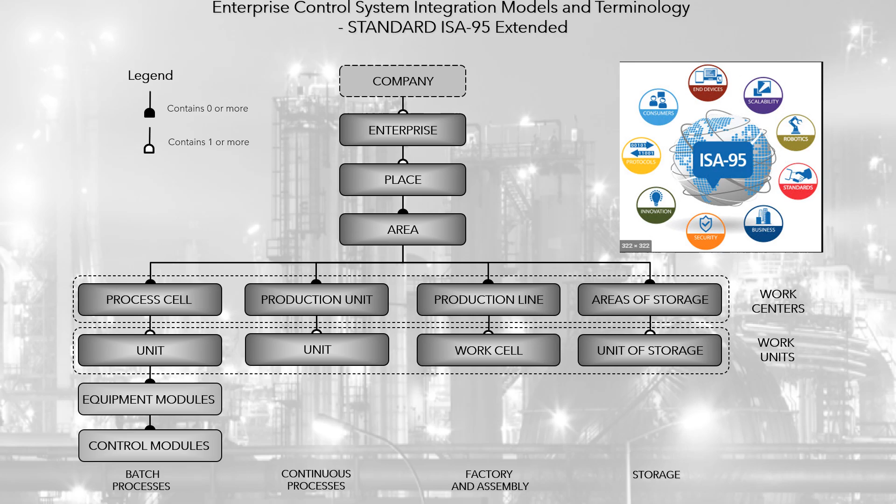To describe the structure of a refinery, HAi has selected the ISA 95 standard, which allows easy sharing of information with other systems and/or mathematical models that share this standard. The refining industry aims to obtain from petroleum a series of products of well-defined quality, ranging from light gases, such as butane and propane, to heavy fractions, fuel oil, asphaltenes, through intermediates, gasoline, gas oil and lubricating oils.

Oil as such does not have a use of great importance; its importance lies in the fact that from it, through a series of physical and/or chemical processes, numerous derivatives are obtained, such as fuels, lubricants, solvents, asphalts, paraffinic waxes, etc. The transformation of crude oil into derivatives is carried out in refineries that use crude oil of different physical and chemical characteristics as raw material. The classification of petroleum products is summarized in the table: basic, byproducts, and chemicals and petrochemicals.

Based on the above, a refinery can be conceived as a large process unit, or macro installation, that receives crude oil as input and produces refined products, consuming other inputs and auxiliary services, and producing waste and pollution secondarily. The image presents an example of a refinery, which is composed of 5 facilities, or process units. And an industrial services plant, where the transformation of energy sources is carried out to meet the different forms of energy required by the process plant.

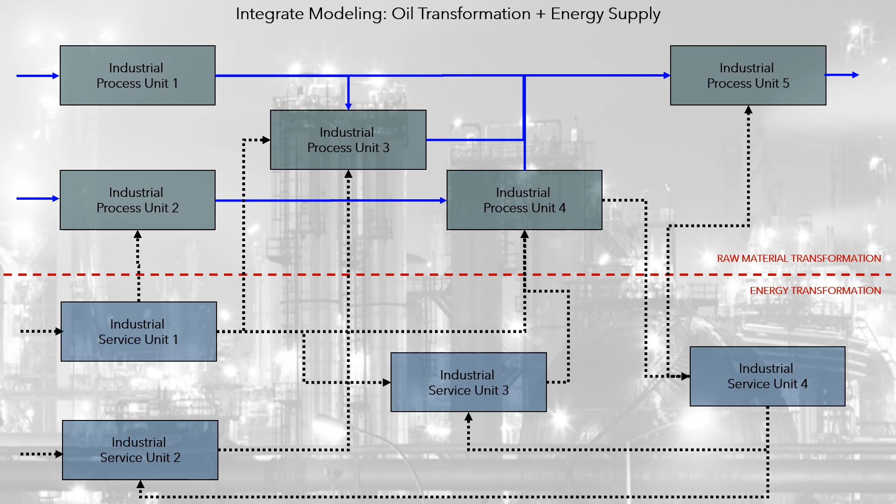Connectivity between the two processes is based on the consumption of auxiliary services, directly and/or indirectly, carried out by the units to carry out the processes that allow the transformation of raw materials into refined products, consumption that is a function of the so-called level of activity of the units. The processing of ancillary services can be conceived primarily as a process of transformation of the energy required by industrial processes. The following diagram summarizes what has been said.

A refinery is the union of two processes. Product processing: conversion of crude oil and biomass into refined products by means of process units. And auxiliary services transformation: processing of ancillary services required by processing units by means of special units, called service units. Units are represented based on the products they consume as inputs and those they produce as outputs.

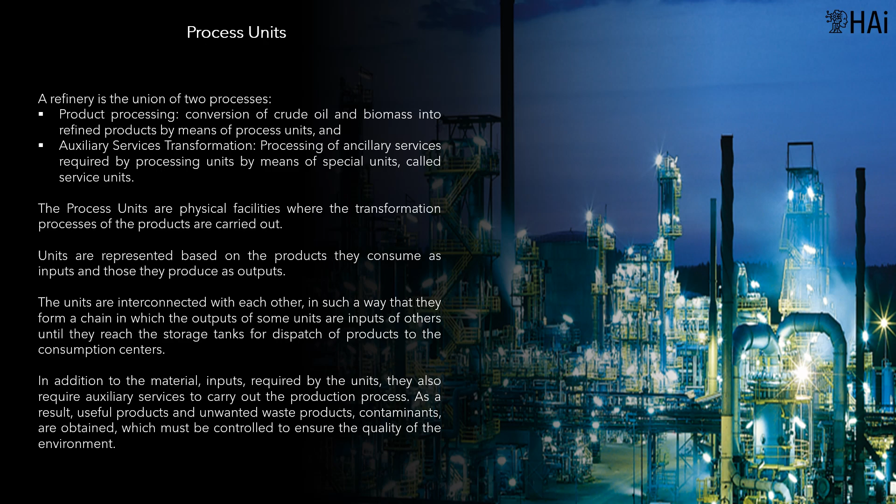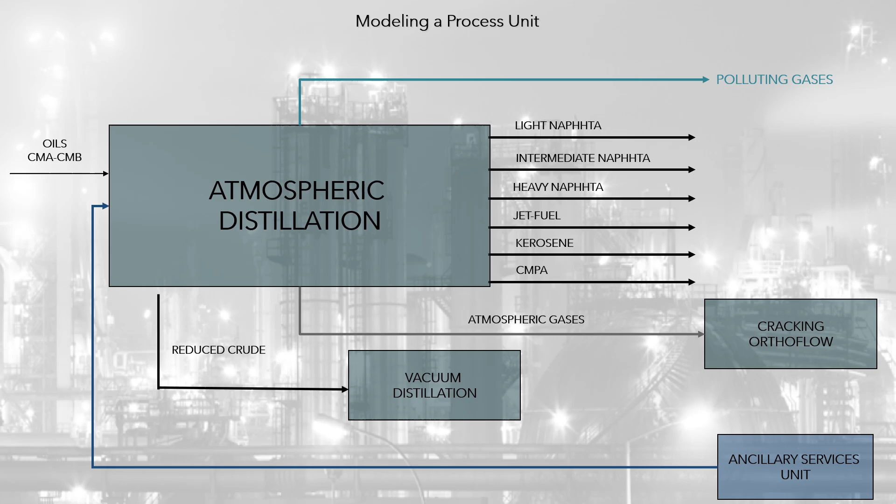The units are interconnected with each other in such a way that they form a chain, in which the outputs of some units are inputs of others, until they reach the storage tanks for dispatch of products to the consumption centers. The process units are physical facilities where the transformation processes of the products are carried out. In addition to the material inputs required by the units, they also require auxiliary services to carry out the production process. As a result, useful products and unwanted waste products, contaminants, are obtained, which must be controlled to ensure the quality of the environment.

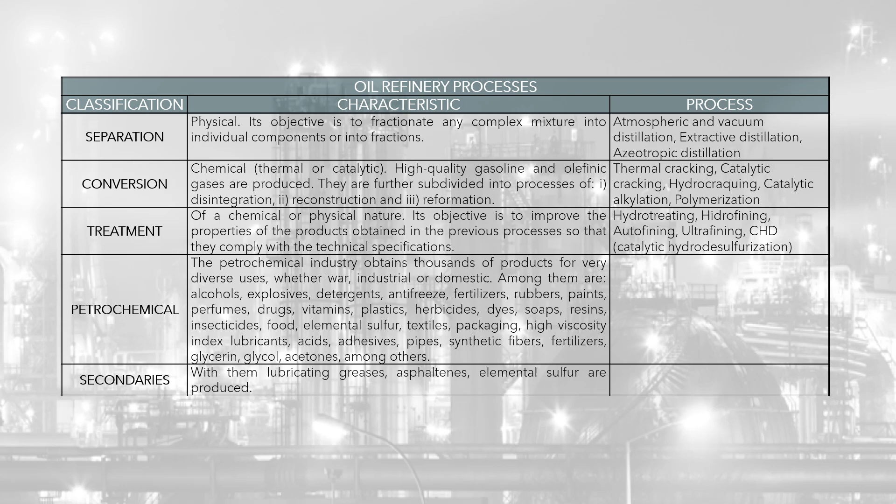As crudes are of different characteristics, refineries must adapt for each of these types, and that is why a refinery can use different processing processes than other refineries. In addition to the difference in crude oil, economic and technical factors also influence the type of refinery. Despite these differences, in general terms, refinery processes are divided into separation, conversion, and product treatment or finishing processes. In addition to these so-called primary, or basic, processes, there are others such as petrochemicals and secondaries.

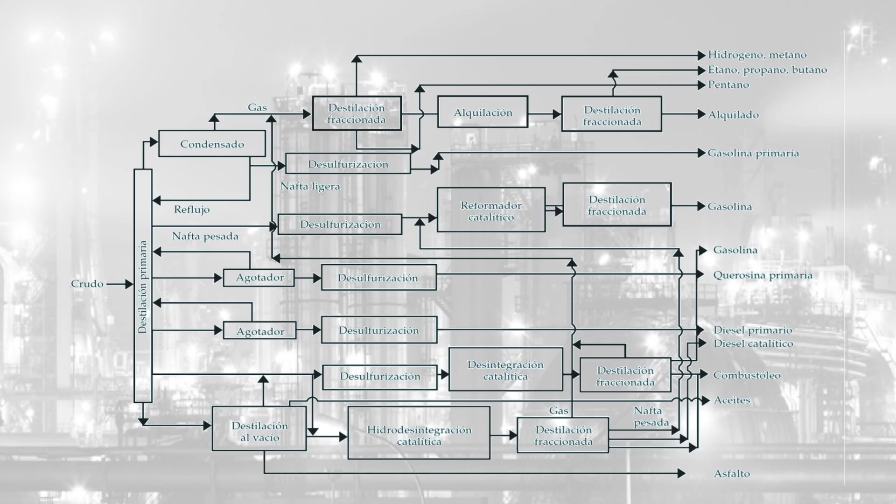The graph presents a general diagram of what a crude refinery can be, which can be summarized as the connectivity of a set of process units of different types that work together to produce the refined petroleum products demanded by the market. The types of technological processes that are carried out in the process units that make up the refinery are presented in the table.

A biorefinery is a structure that integrates biomass conversion processes, organic matter of animal or vegetable origin, and equipment to produce fuels, energy and products. Under the generic name of biomass, a very heterogeneous set of materials is included.

Both by its origin and by its nature, it is possible to differentiate it in natural biomass, that produced by wild ecosystems such as algae, green plants and forest products; and residual biomass, that which can be extracted from agricultural and forestry residues, and human activities.

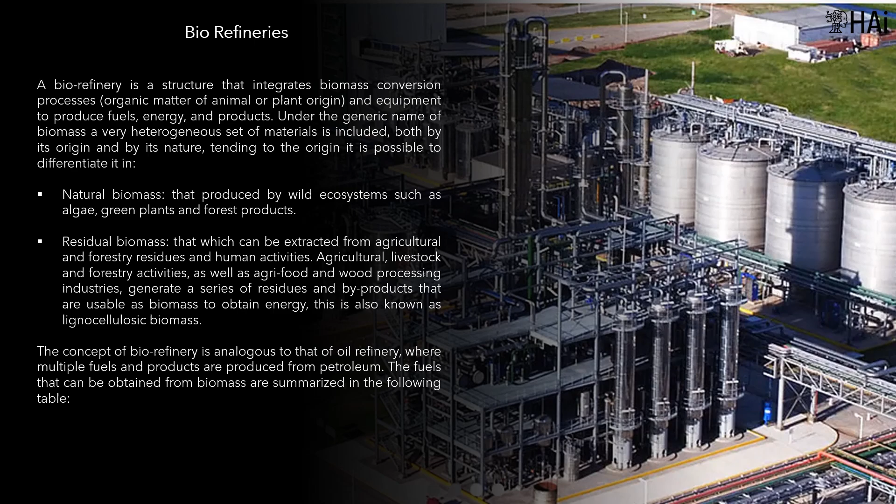Agricultural, livestock and forestry activities, as well as agri-food and wood processing industries, generate a series of residues and byproducts that are usable as biomass to obtain energy. This is also known as lignocellulosic biomass.

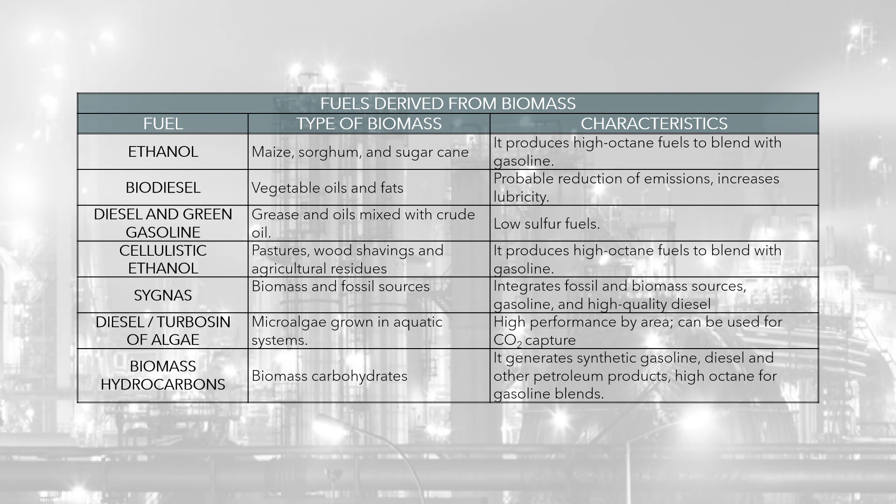The concept of biorefinery is analogous to that of oil refinery, where multiple fuels and products are produced from petroleum. The fuels that can be obtained from biomass are summarized in the table. The image presents an example of a sugarcane ethanol biorefinery, which is composed of 6 process units.

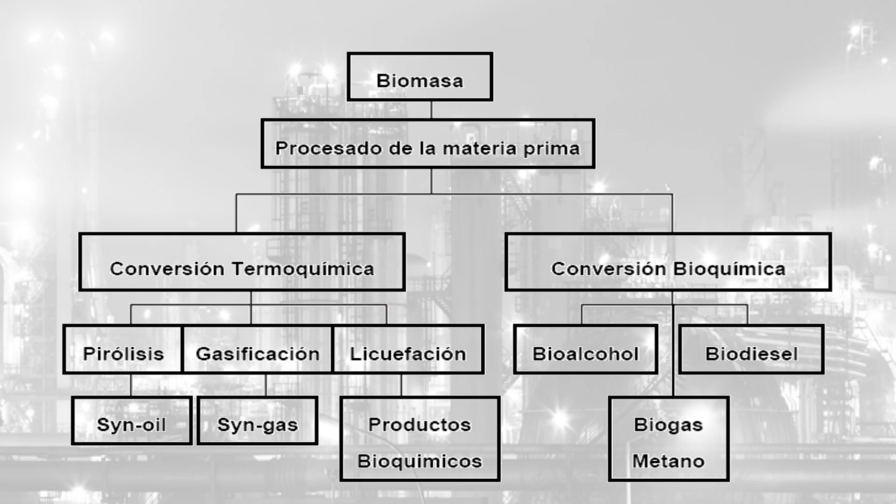Linear optimization model for sales and operations planning, S&OP. HAI-OIL-REF includes a generic model that can serve interchangeably to plan, at the aggregate level, the 2 crude and/or biomass refining processes. The level of aggregation is fundamentally related to the non-linearities associated with this type of process, but not with the level of detail with which it is possible to represent the production processes, which can be spatially detailed in all units used in the production of refined products.

HAI-OIL-REF considers the refining process as a union of 2 processes: product transformation, conversion of crude oil and biomass into refined products through process units, and energy transformation, processing of auxiliary industrial services required by process units, which are consumers and/or energy producers, in so-called service units. The objective of optimization is to determine the production plan that meets the demand for refined products, according to an offer of available crude strips, purchased or to buy, during the planning period.

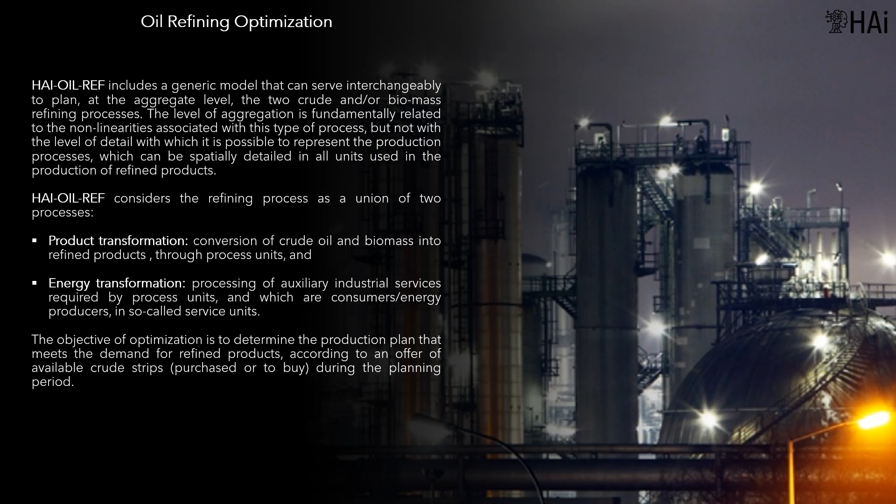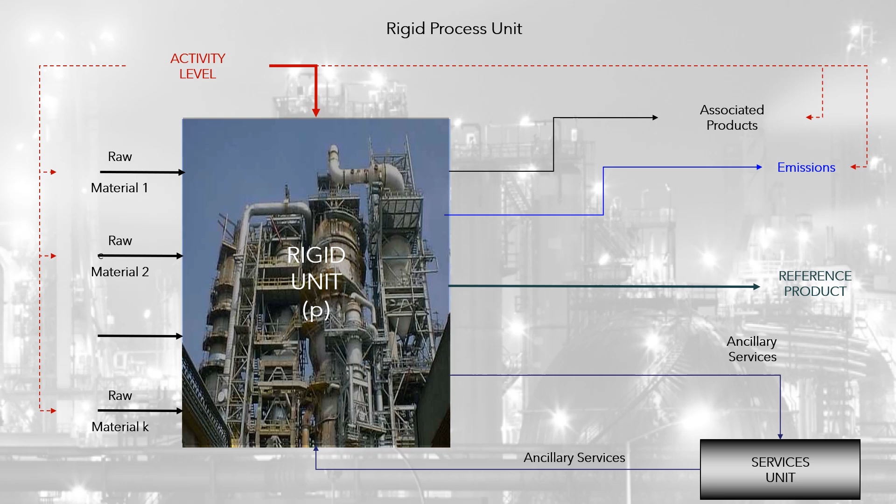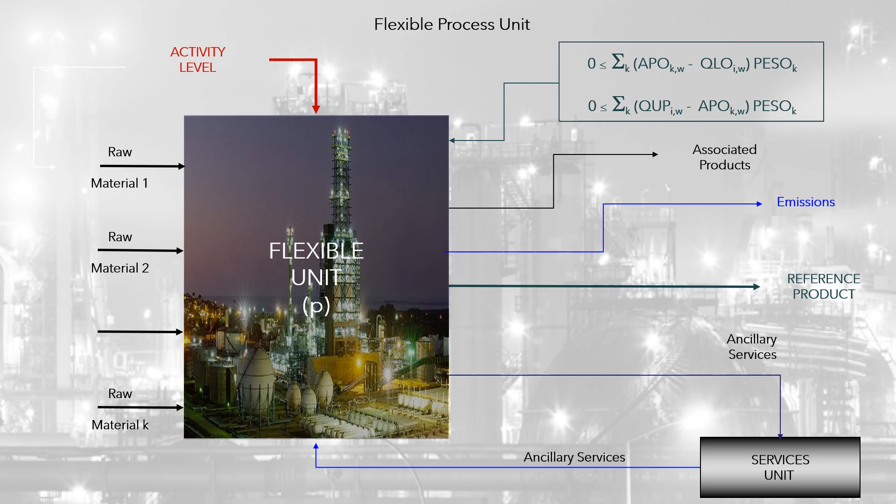From the point of view of mathematical modeling, HAI-OIL-REF considers 2 types of process units. Rigid unit considers a unit as a process that is defined based on certain input, raw material, refined final or intermediate products, and that produces refined products in fixed proportions; and flexible unit considers multiple possibilities for production processes in which the proportions of the blending of the products consumed, and the quantities produced, are determined by the model. For flexible units, quality specifications must be introduced as part of the model constraints, so that the volume and/or weight product generated by the model meets these specifications.

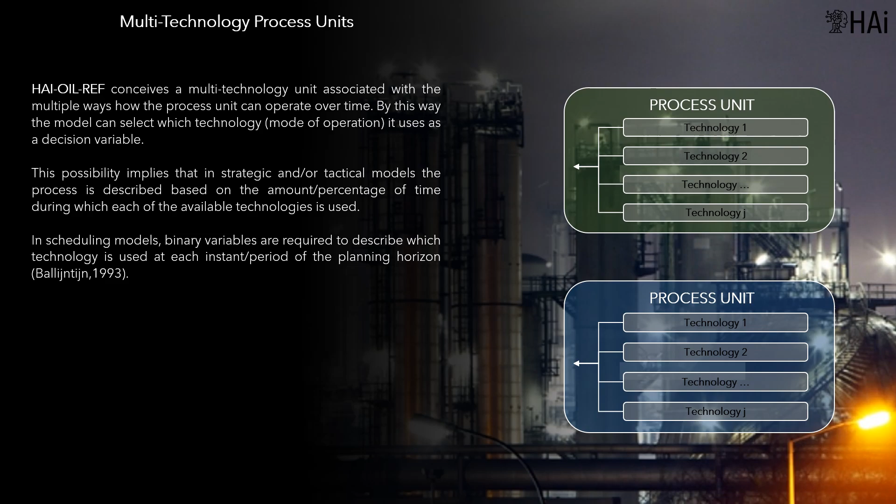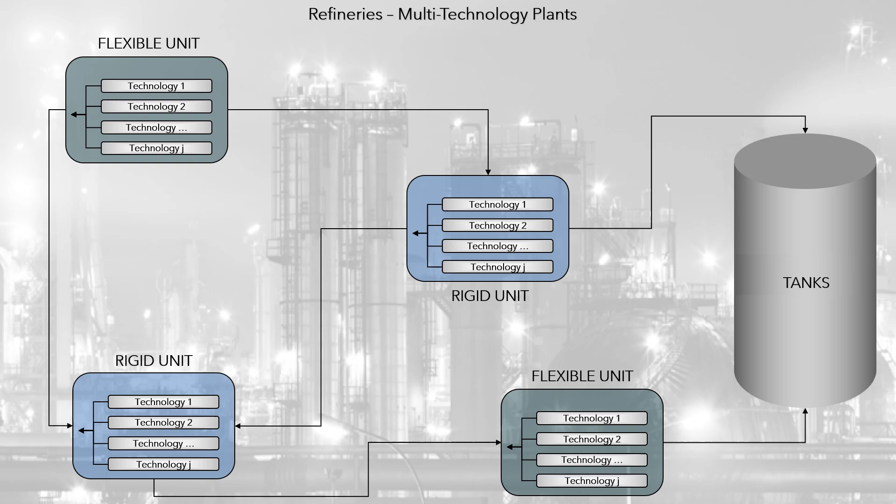HAI-OIL-REF includes a multi-technology unit, associated with the multiple ways the process unit can operate over time. This way, the model can select which technology, mode of operation, it uses as a decision variable. This possibility implies that in strategic and/or tactical models the process is described based on the amount, or percentage, of time during which each of the available technologies is used. In scheduling models, binary variables are required to describe which technology is used at each instant, or period of the planning horizon.

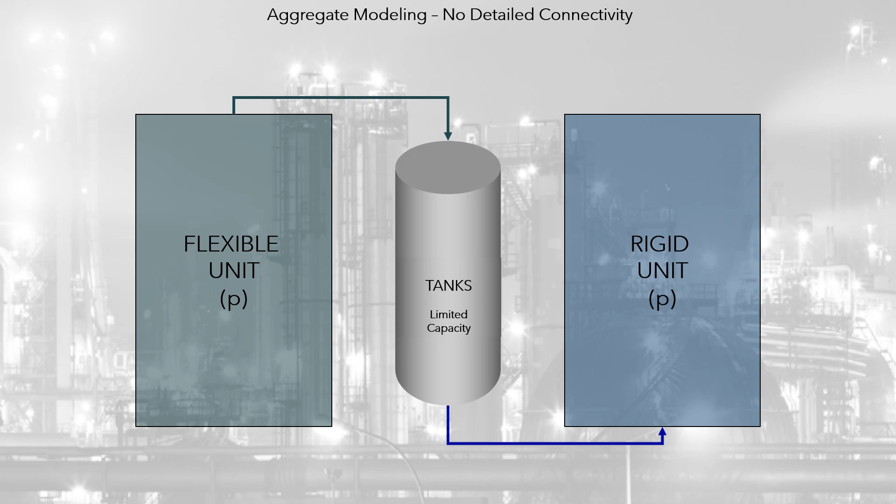The modeling of the connectivity between production units can be done in an aggregated way, through tanks, or in detail through collectors. This representation is appropriate when one wants to visualize bottlenecks in the flow of products, and when one wants to link the auxiliary service plant with the process plant.

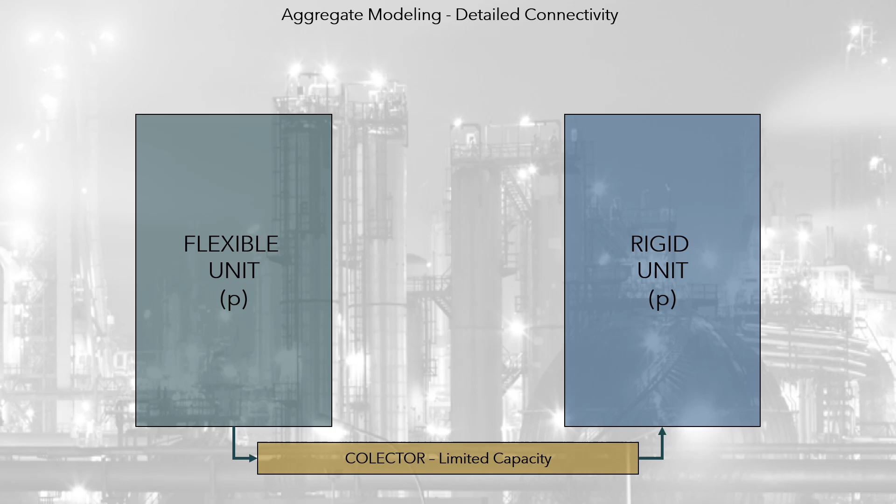Modeling a refinery based on a single type of unit has its drawbacks. A fixed refinery always produces excessive amounts of some finished products. A flexible one generally has too much flexibility compared to a real refinery. That is why the best strategy to model refineries is based on a combination between rigid and flexible units considering costs, demand, capacity, production, profit, and possible expansion of the refinery.

However, the units, rigid or flexible, can operate continuously or in batches. In addition, the flexibility of the unit extends not only to the different refined products but also to the different raw materials, to the sources of the raw materials or even to any possible combination of them. In this way, the refinery processes can be optimized through a model with a unified mathematical representation, where all types of units, processes, and forms of operation are incorporated. As a byproduct of processes, the pollutants of the environment are considered, on which restrictions may be imposed.

Linear optimization model. Mathematical formulation. Based on the above, a model of the refining process is proposed that allows describing a refinery composed of multiple multi-technology units, rigid or flexible, differentiating each type of unit with its own equations.

To unify the modeling around a common production reference, all units will be associated with the concept of activity level of the unit technology, which must be defined based on the quantity produced of one of the outputs of the unit, presumably the most representative resulting product.

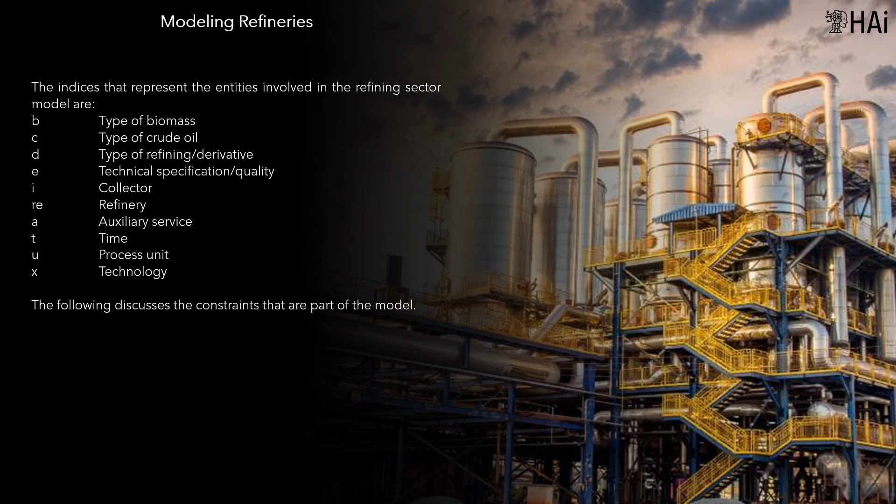The indexes that represent the entities involved in the refining sector model are B type of biomass, C type of crude oil, D type of refining/derivative, E technical specification/quality, I collector, refinery, A auxiliary service, T time, U process unit, and X technology. The following discusses the constraints that are part of the model.

Production capacity. The processing capacity is calculated based on the length of the planning period T, from a nominal daily capacity. This calculation process is typical of strategic and tactical models, but differs in the case of operating models, in which binary variables are used to assign the entire output of a period to a technology or mode of production. Additionally, the restriction of time allocation to technologies must be met.

Rigid units. In rigid units, fixed input-output coefficients are assumed, and modeled based on the activity level of the unit. In this case, technical or quality specifications are not considered, since it is assumed that the established mixture meets the specifications. The equation is similar for the amount of final products and byproducts consumed and/or produced.

Flexible units. In flexible units, the proportion of the mixture is determined in the optimization process. In this case, quality restrictions are incorporated that the mixture must satisfy. The model presented has as a hypothesis a unit that consumes multiple types of crude oil, or biomass, and that produces a main product, on which the technical specifications, or quality, that said product must meet are established.

The remaining products and/or byproducts are established proportionally, based on the amount of main product that is produced, that matches the activity level of the unit. Then, activity level of the unit equals production of the main product in the unit. The theory supporting flexible mixtures is presented below.

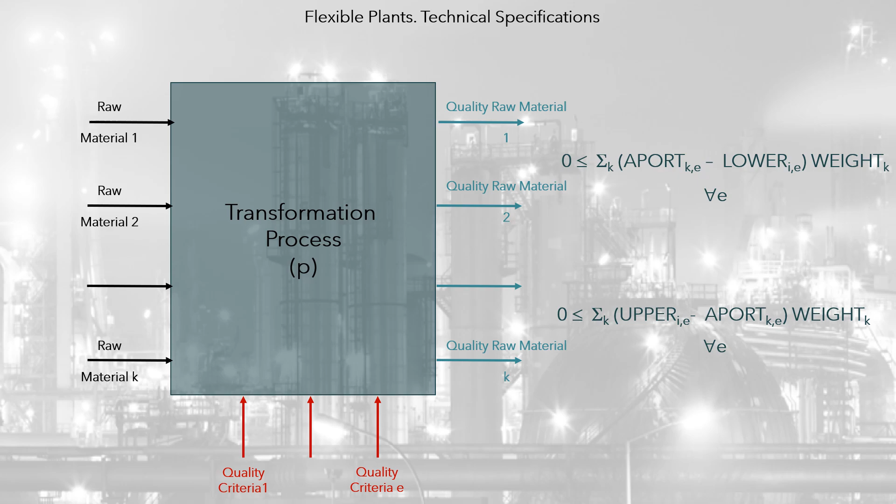Flexible units. This implies the following set of equations. The first defines the activity level of the flexible unit based on the production of the main product. Based on this, it is possible to formulate two equations, one for volume and another for weight. A similar equation can be formulated for biomass process units.

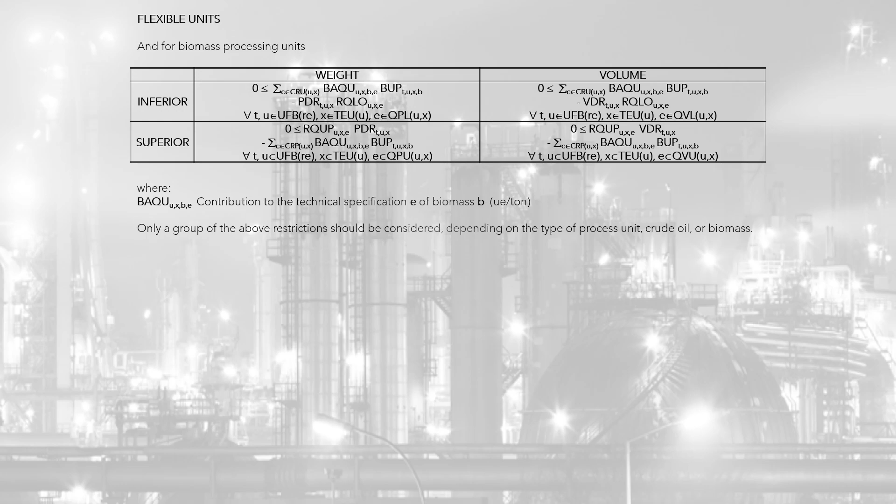Operational variables. The operational variables refer to the existing variations in the technology, in the different units according to the technical specification of biomass or crude. An example is the units that process products which tend to depend intrinsically on the technical specification of the crude oil, or biomass, such as vacuum distillation, or atmospheric distillation columns. In this case, the technical specifications of the crude oil or biomass vary affecting the unit. In other types of units and technologies that do not depend on the technical specification of the crude oil or biomass, they operate at a constant value.

These variables can affect the quantities of both consumption and production of products, and/or byproducts in a unit, as well as the cost of operating the unit, according to the conditions under which the refinery operates, and its deviation from how it was designed. Balance of matter in collectors. For detailed models, the collectors must satisfy the balance of matter, that indicates that what is received must be equal to what is delivered. Additionally, the capacity restriction of the collector must be considered.

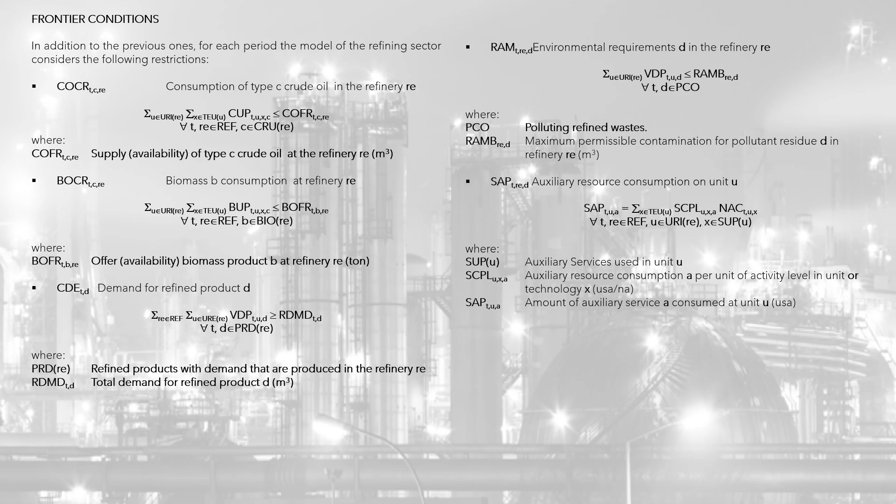Frontier conditions. In addition to the previous ones, for each period the model of the refining sector considers the following restrictions: consumption of type C crude oil in the refinery RE, biomass B consumption at refinery RE, demand for refined product, environmental requirements D in the refinery RE, and auxiliary resource consumption on unit U.

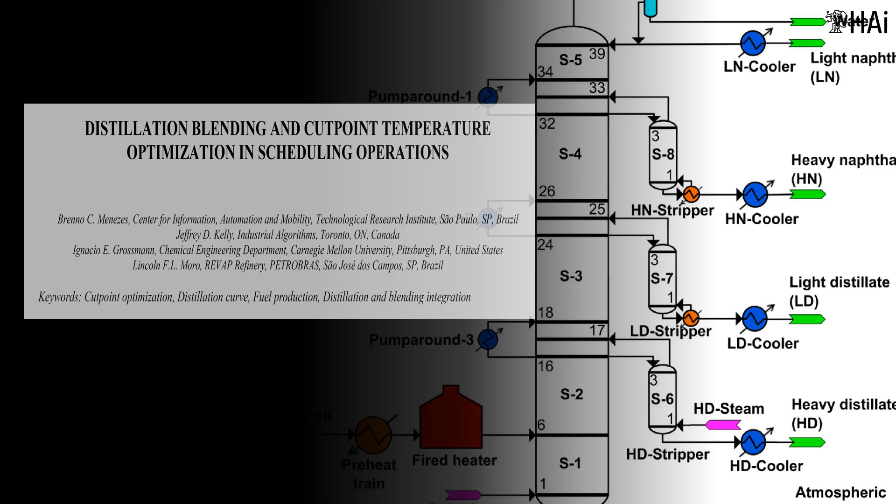Fractional distillation optimization. It is the activity related to the distillation of petroleum and the crude distillation units, CDUs. The hypotheses of linearity of the processes in the refinery are not met, and therefore the exact optimization must consider the nonlinearities of the petrochemical processes. Within these, the description of the behavior of the CDUs is very important, since it is the core of the refining business. This section is based on the document Distillation Blending and Cut Point Temperature Optimization in Scheduling Operations.

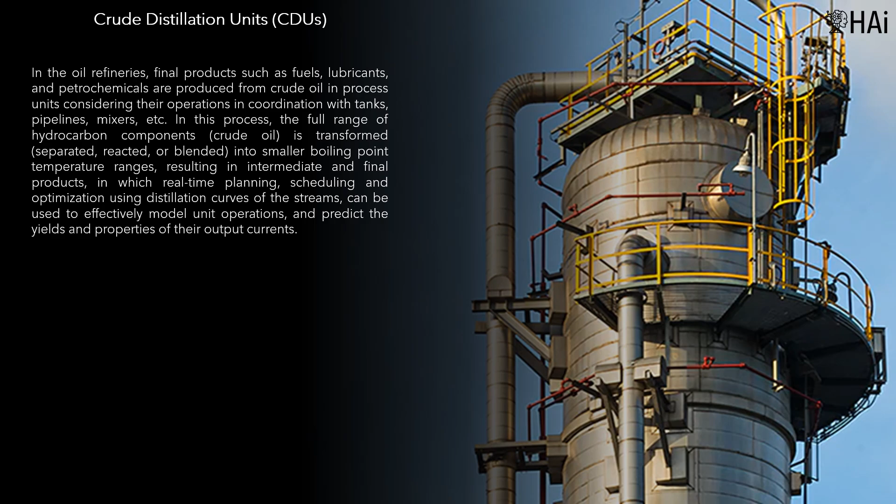Crude Distillation Unit, CDU. In the oil refineries, final products such as fuels, lubricants, and petrochemicals are produced from crude oil in process units, considering their operations in coordination with tanks, pipelines, mixers, etc. In this process, the full range of hydrocarbon components, crude oil, is transformed, separated, reacted, or blended, into smaller boiling point temperature ranges, resulting in intermediate and final products, in which real-time planning, scheduling and optimization using distillation curves of the streams can be used to effectively model unit operations, and predict the yields and properties of their output currents.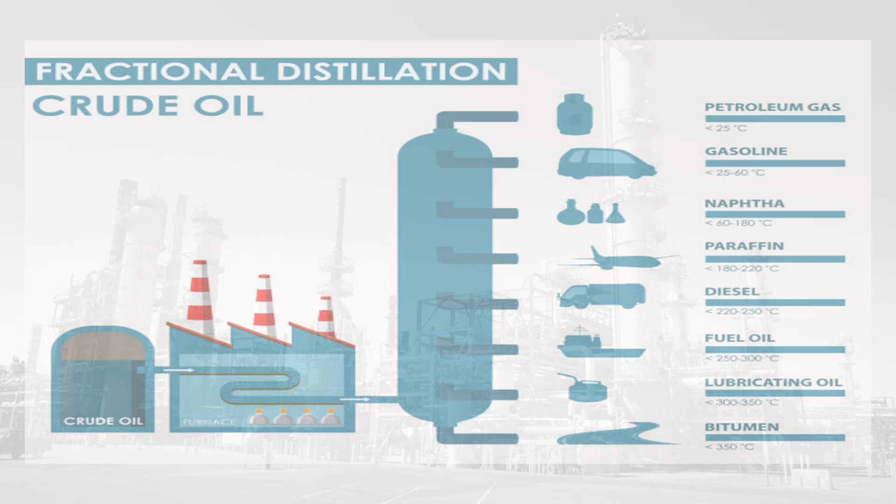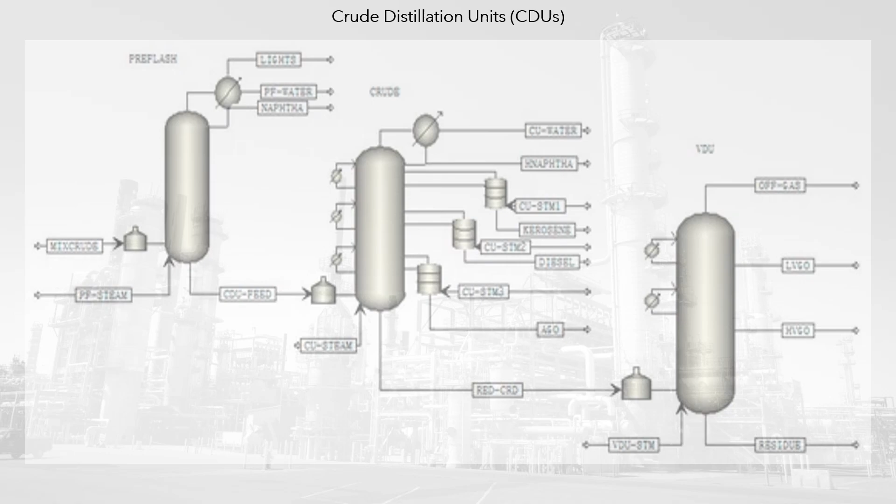The graph presents the fractional distillation process, which produces all petroleum products. They vary depending on the temperature at which they are extracted from the distillation tower. To maximize efficiency, effectiveness and economy of mixing, blending, reacting, converting and separating, fractionating inside the oil refinery, normally the refinery is formed by a chain of CDUs. Unit operation processing and product blending are integrated by monotone interpolation, to mix and reduce distillation and evaporation temperatures, for petroleum products in an optimization environment.

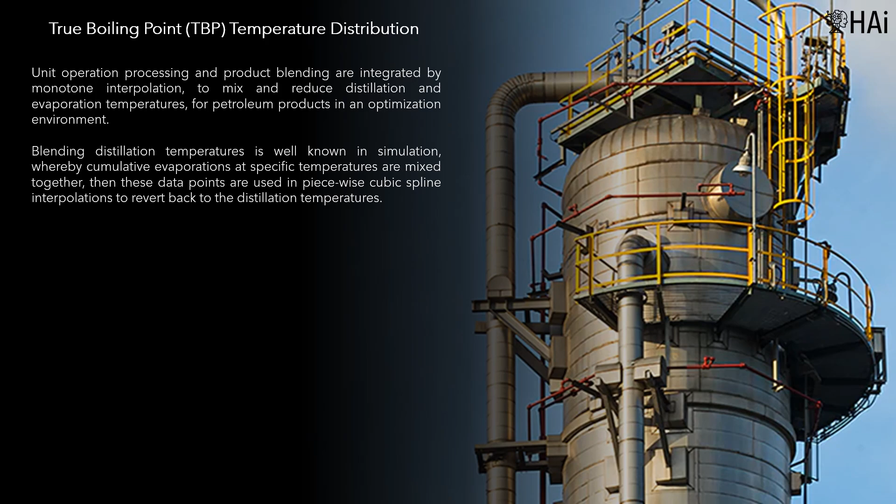Blending distillation temperatures is well known in simulation, whereby cumulative evaporations at specific temperatures are mixed together, then these data points are used in piecewise cubic spline interpolations to revert back to the distillation temperatures. The graph shows the nonlinear behavior in the extremes of the distillation curves, where increments in the temperature, abscissa, cause a nonlinear increment in the evaporations, ordinate.

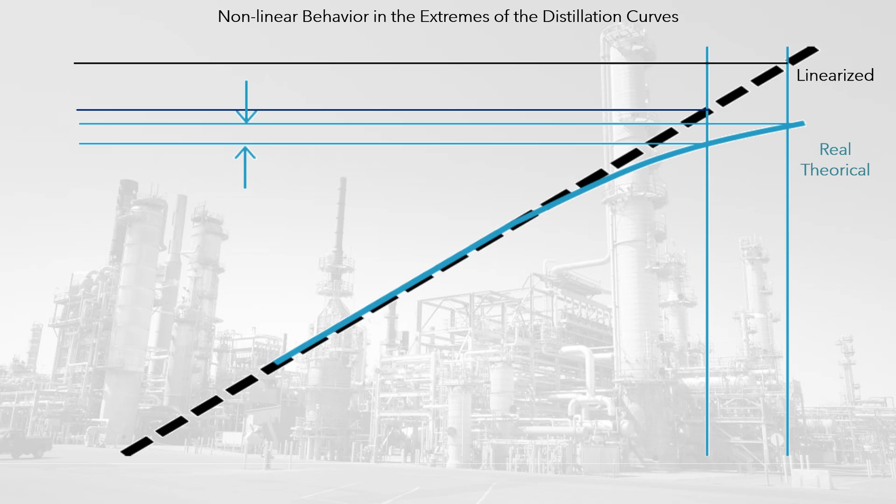Hydrocarbon streams, crudes, fuels, petrochemicals, are characterized by distillation curves in terms of their quantity, yield, and quality, properties, and how they vary with respect to temperature. These data are determined by experimental methods using laboratory distillation columns in which hydrocarbon fractions are collected at certain boiling point temperatures, to define their quantity and quality data at each boiling temperature. This data can be used in mathematical models.

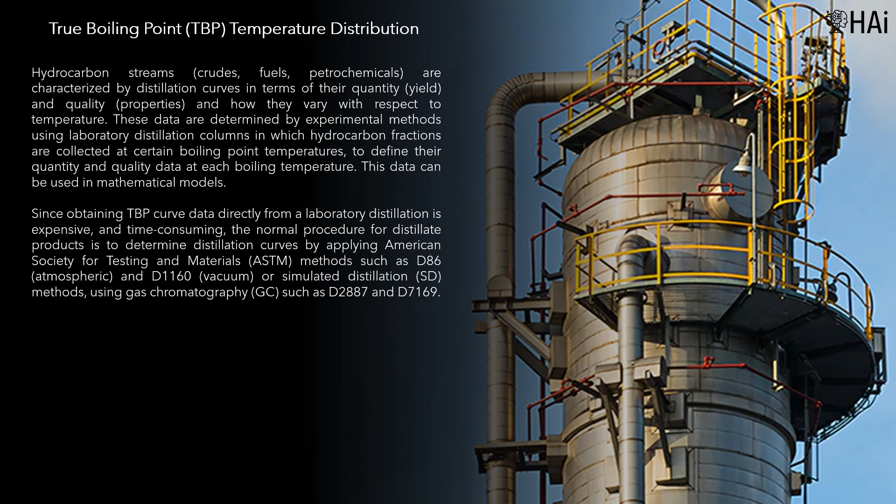Since obtaining TBP curve data directly from a laboratory distillation is expensive and time-consuming, the normal procedure for distillate products is to determine distillation curves by applying American Society for Testing and Materials (ASTM) methods such as D86 atmospheric and D1160 vacuum or simulated distillation (SD) methods using gas chromatography (GC) such as D2887 and D7169.

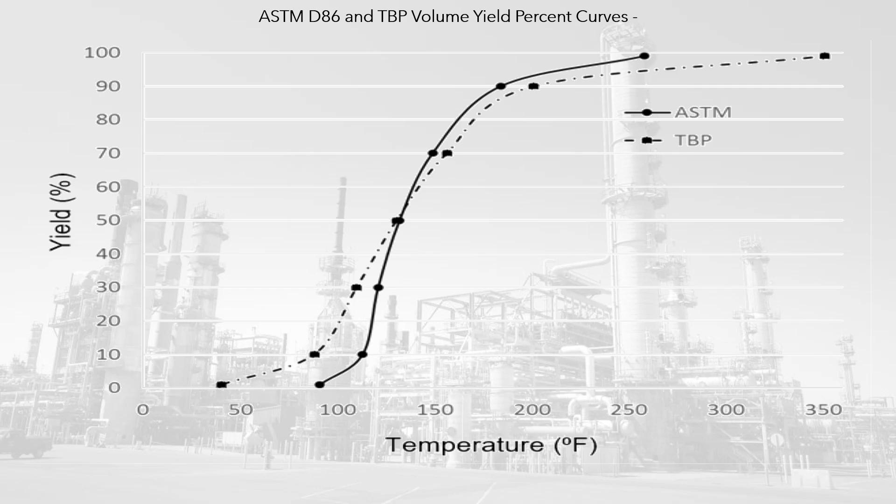The figure shows the ASTM D86 and TBP data from the Colorado School of Mines for a straight-run gasoline stream from a CDU, plotted with volume yield percent as the ordinate. The ASTM D86 and TBP temperatures are near equal at their 50% yield point, whereas D86 yields are underestimated below the 50% yield, and D86 yields are overestimated above the 50% yield.

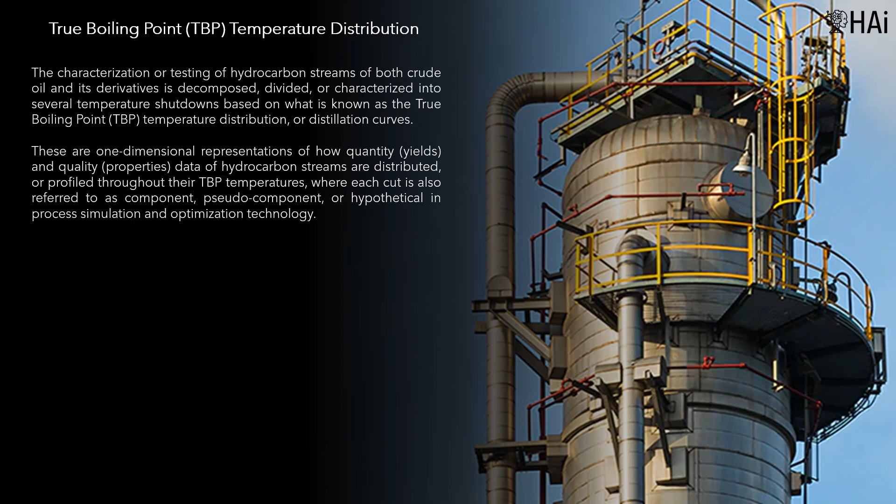The characterization or testing of hydrocarbon streams of both crude oil and its derivatives is decomposed, divided, or characterized into several temperature cuts based on what is known as the true boiling point, TBP, temperature distribution, or distillation curves. These are one-dimensional representations of how quantity, yields, and quality, properties, data of hydrocarbon streams are distributed, or profiled throughout their TBP temperatures, where each cut is also referred to as component, pseudo-component, or hypothetical in process simulation and optimization technology.

If we compare a CDU's crude oil feed distillation curve with all its product distillation curves, it is interesting to see what are known as overlaps between the light and heavy adjacent products. This represents what is referred to as non-sharp or non-ideal fractionation.

The difficulty with blending the distillation temperatures from several component materials is that these TBP distillation temperatures do not blend linearly on a mass or volume basis. Mixing indices for distillation temperatures, and for other properties such as cloud point, pour point, viscosity, etc., allow indexed, or transformed, properties to be mixed linearly.

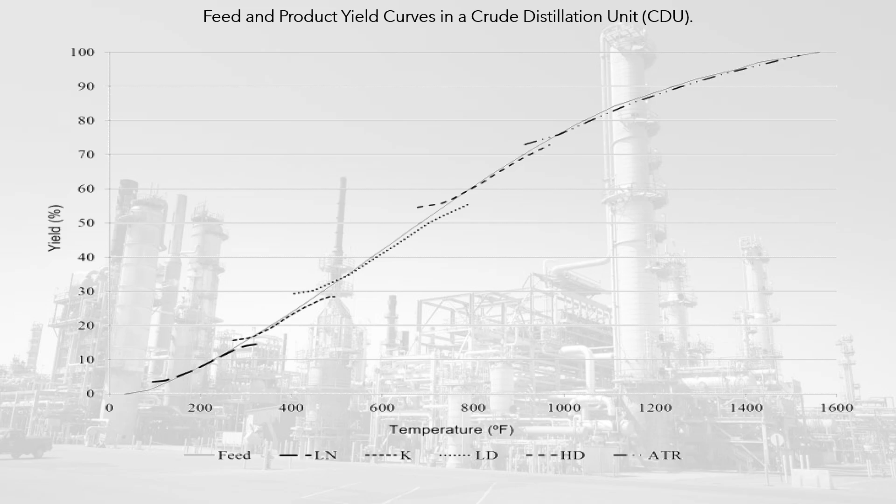The authors propose a technique to optimize the mixing of the distillation curves of various streams, by adjusting the cut temperatures of the distilled streams, in effect, their initial boiling point, IBP, and final boiling point, FBP, to manipulate their TBP curves in offline or online environments.

By changing or adjusting the front end and back end of the TBP curve for one or more distillate blending streams, it allows for better control and optimization of the quantity and quality of final product demand, allowing for better maneuvering closer to and around downstream bottlenecks, such as tight property specifications and volatile time and demand flow constraints.

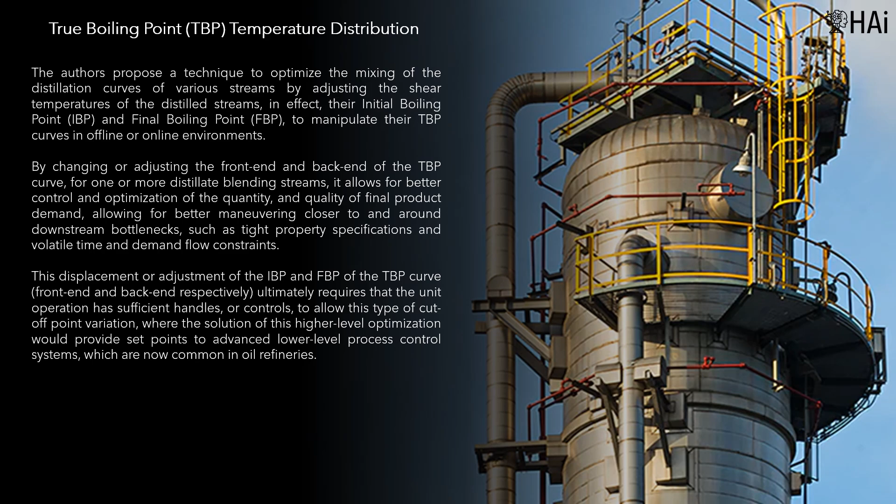This displacement or adjustment of the IBP and FBP of the TBP curve requires that the unit operation has sufficient handles, or controls, to allow this type of cutoff point variation, where the solution of this higher level optimization would provide set points to advanced lower-level process control systems, which are now common in oil refineries.

When yields, evaporations or relative distilled quantities are used as a function of temperature, IBP, T01, and FBP, T99, can be manipulated, for example, to adjust or shift the distillation curve by interpolation and/or extrapolation, to increase or decrease the front end and back end of the curves.

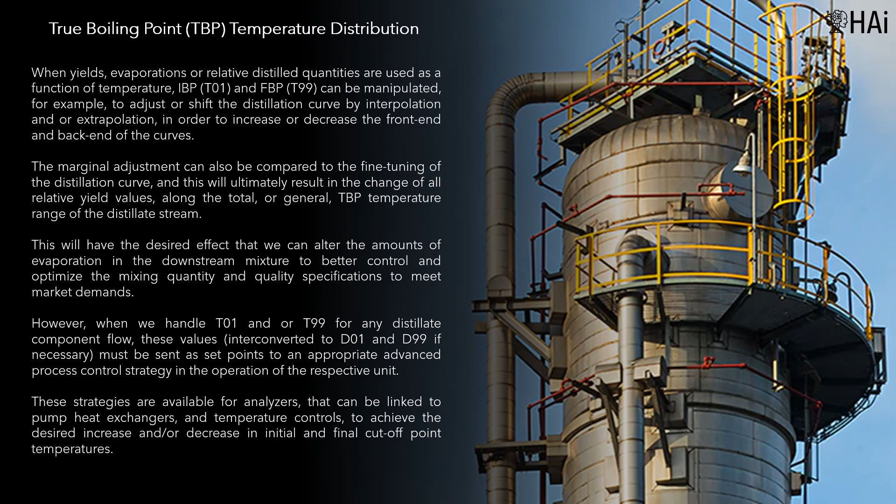The marginal adjustment can also be compared to the fine-tuning of the distillation curve, and this will ultimately result in the change of all relative yield values along the total, or general, TBP temperature range of the distillate stream. This will have the desired effect that we can alter the amounts of evaporation in the downstream mixture to better control and optimize the mixing quantity and quality specifications to meet market demands.

However, when we handle T01 and/or T99 for any distillate component flow, these values, interconverted to D01 and D99 if necessary, must be sent as set points to an appropriate advanced process control strategy in the operation of the respective unit. These strategies are available for analyzers that can be linked to pump heat exchangers and temperature controls, to achieve the desired increase and/or decrease in initial and final cutoff point temperatures.

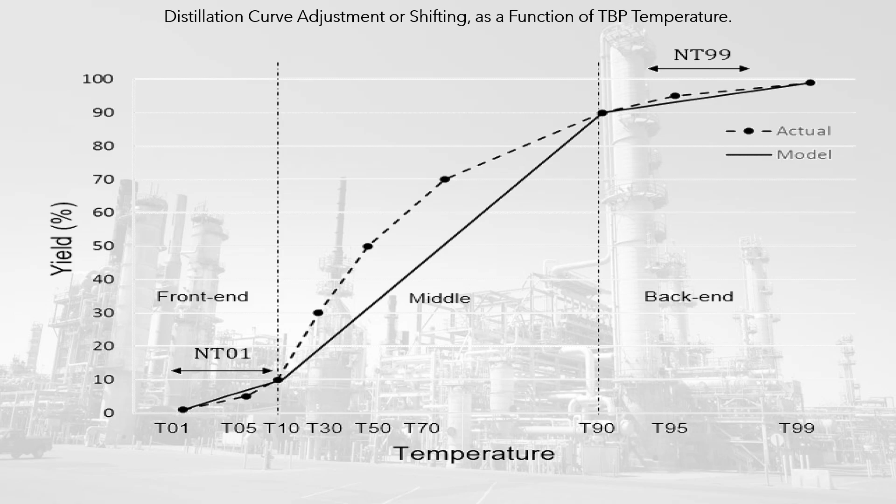Considering that the example is a straight-run gasoline, its old IBP, OT01, and FBP, OT99, are 91 and 230 Fahrenheit degrees, as seen in the actual figure. If in an optimization problem the new IBP, NT01, and FBP, NT99, change to 85 and 214 Fahrenheit degrees, respectively, we expect a hydrocarbon amount increase in the front end, lighter fraction, and decrease in the back end, heavier fraction,

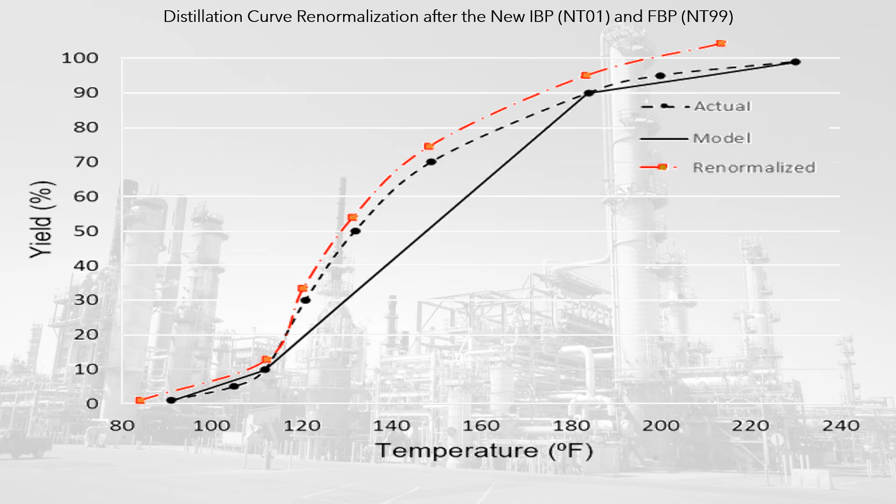of the distillation curve, which means that the front end of the gasoline in the optimized problem receives lighter hydrocarbon fractions from its lighter adjacent neighbor, and the back end is reduced, giving material to its heavier adjacent neighbor, both with respect to the extrapolation in the initial, front end, and final, back end, of the distillation curve.

The steps of mixing distillates and optimizing the cutoff temperature by monotone interpolation are: first, move from faster and less expensive experimental methods, such as ASTM D86, to slower and more expensive TBP temperatures, using well-established interconversion analytical expressions. Second, these interconverted TBP temperatures are converted into pseudo-component-like cumulative evaporations in process design simulators using monotone interpolation, linearly mixed by mass or volume, then converted back to TBP temperatures using another monotone interpolation. If necessary, these values are converted back to ASTM D86.

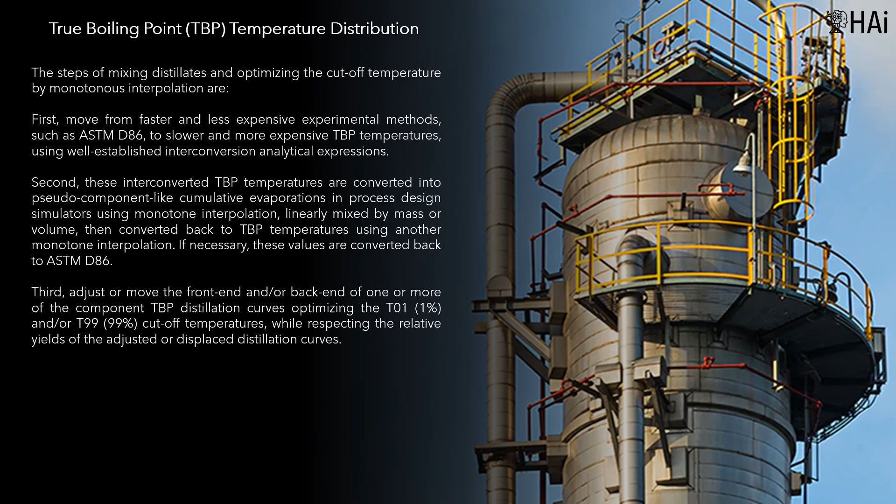Third, adjust or move the front end and/or back end of one or more of the component TBP distillation curves, optimizing the T01, 1%, and/or T99, 99%, cutoff temperatures, while respecting the relative yields of the adjusted or displaced distillation curves. Significant economic benefits can be achieved by implementing such an algorithm, especially for ultra-low sulfur fuels, that always require accurate prediction of key evaporation points in the distillation curves of the final product.

Case: Crude oil scheduling and refinery planning. This case is based on the document Crude oil scheduling and refinery planning by Lagrangian relaxation. Both crude oil scheduling and refinery planning are formulated as optimization problems, and are integrated into a single full-space MINLP.

The integrated formulation is constructed based on the overlap between the CDU charging operations at the scheduling level and the CDU feeding decisions at the planning level. An MILP priority slot-based continuous time crude oil scheduling formulation, and a multi-period discrete time NLP refinery planning formulation are used.

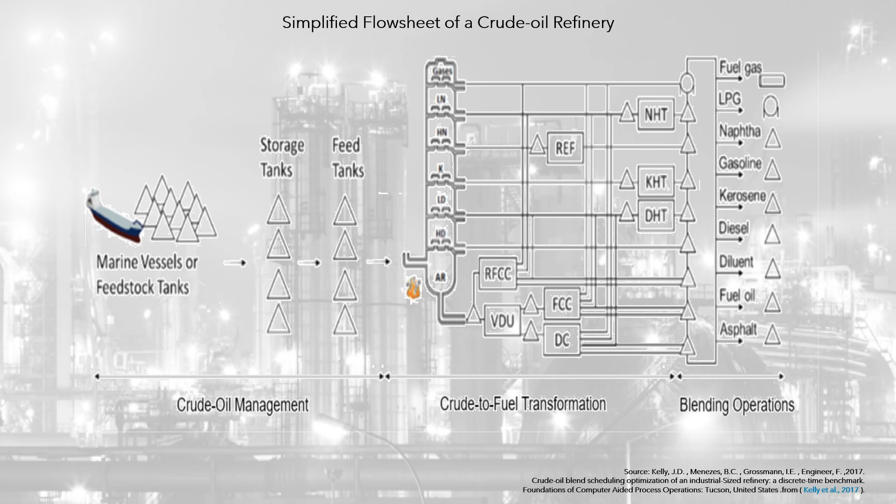A multi-scale framework has been proposed to integrate different time representations. A simplified flowsheet of a crude oil refinery is shown in the graph. The process is divided into 3 stages: crude oil management, crude to fuel transformation, and blending operations.

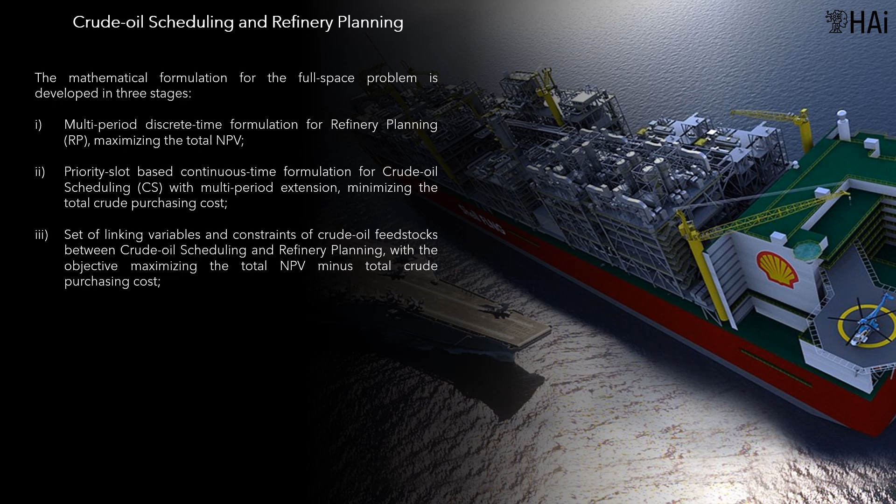The mathematical formulation for the full space problem is developed in 3 stages. Multi-period discrete time formulation for refinery planning, RP, maximizing the total NPV. Priority slot-based continuous time formulation for crude oil scheduling, CS, with multi-period extension, minimizing the total crude purchasing cost, and set of linking variables and constraints of crude oil feedstocks between crude oil scheduling and refinery planning, with the objective maximizing the total NPV minus total crude purchasing cost.

The custom indicates that the most common position, when formulating a mathematical model, is an integral formulation, full space, which brings together in a single formulation all the equations that define the problem. This corresponds to a top-down approach. In this case, the model could be called Crude Oil Scheduling and Refinery Planning Model.

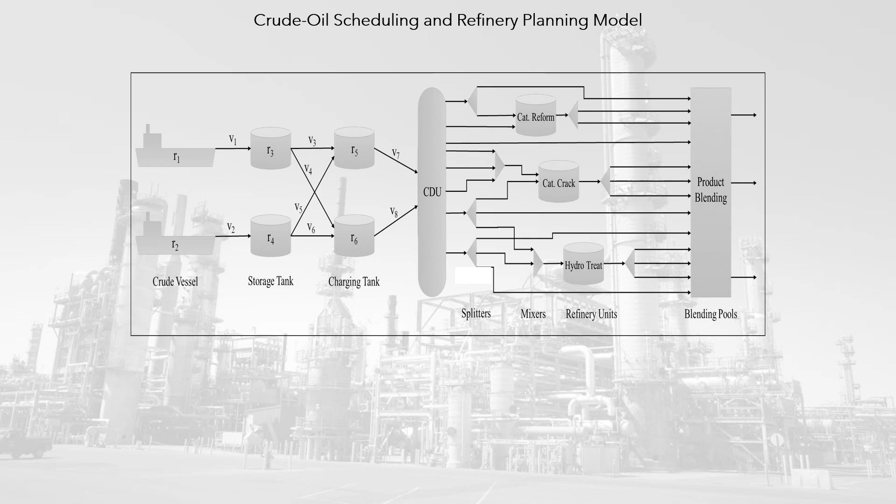However, considering the evolution of computational power and algorithms, today an ascending formulation is indicated, that starts from the atoms, that is, from the basic parts of the problem. This corresponds to a bottom-up approach. The case presented is a good example of this approach, dividing the problem into two formulations, Crude Oil Scheduling Model and Refinery Planning Model. These formulations are integrated to form the holistic model.

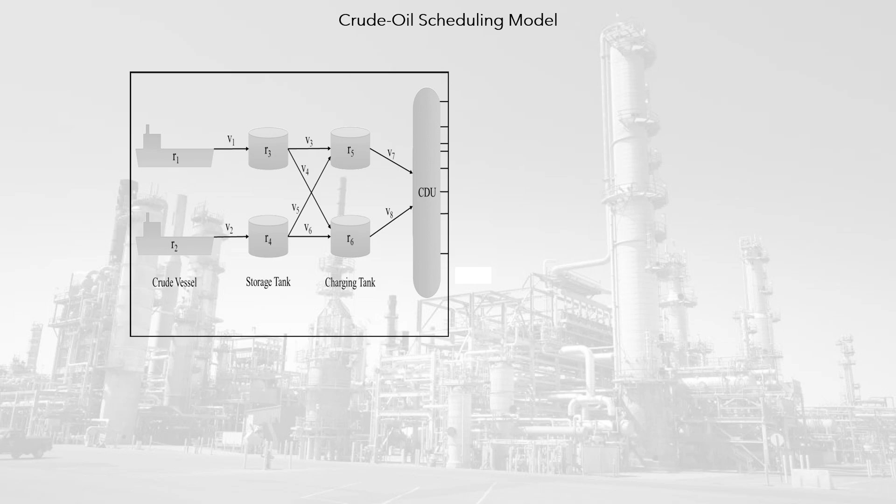The crude oil scheduling model represents the first part of the process. This type of scheduling problem is usually formulated as continuous time models, which facilitates the coordination of activities exactly, at the instant level. The refinery planning model is more oriented to the use of discrete time formulation, since it involves the planning of activity volumes in multiple process units by periods. Proper handling of these two formulations is easier under the divide and conquer approach.

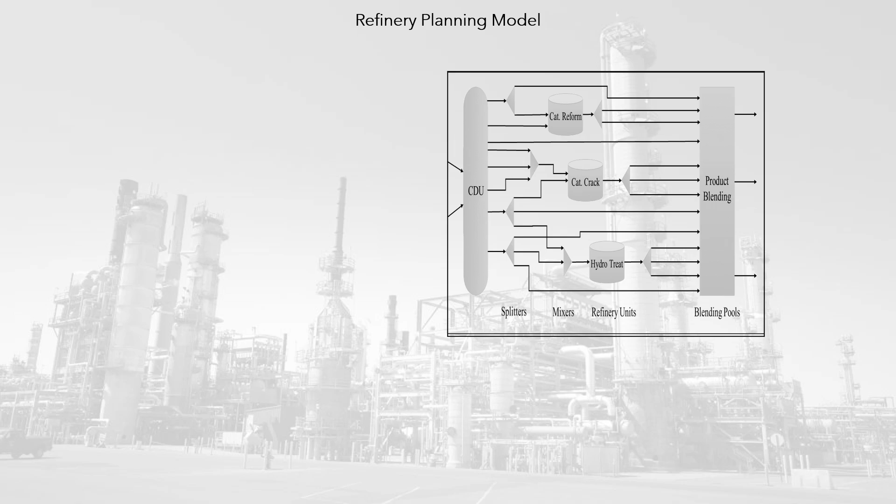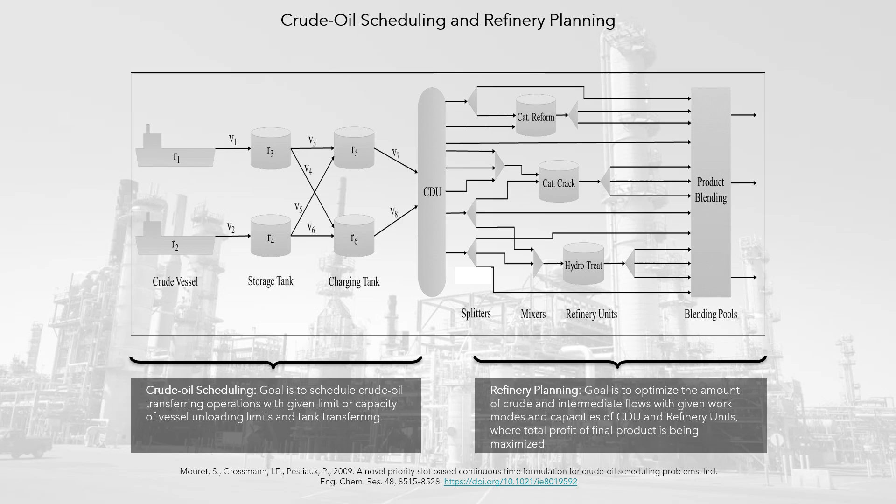The graph shows the flow rates in the simplified refinery planning example. The goals of the two models are: crude oil scheduling, the goal is to schedule crude oil transfer operations, with a certain limit for ship unloading capacity and tank transfer, and refinery planning, the goal is to optimize the amount of crude oil and intermediate flows, with working modes and capacities given for the CDU and the refinery process units, where the total benefit of the final product is maximized.

The crude oil scheduling model is a continuous time non-convex MINLP model, based on priority slots. Its main features are: given vessel arriving and leaving time, tank inventory management, CDU charging continuously through time, and non-overlapping inlet and outlet transferring. The key variable is the binary variable Z(i,v), that represents the assignment of the operation v to the priority slot i.

The key constraints are: time decisions in each time slot must have consistency, non-overlapping operations not in same slot, non-overlapping time decisions are ensured by big M type of constraint, nonlinear crude composition constraint, for each slot i, crude c, and outlet operations v, and other mass balance constraints. The objective function is the crude cost.

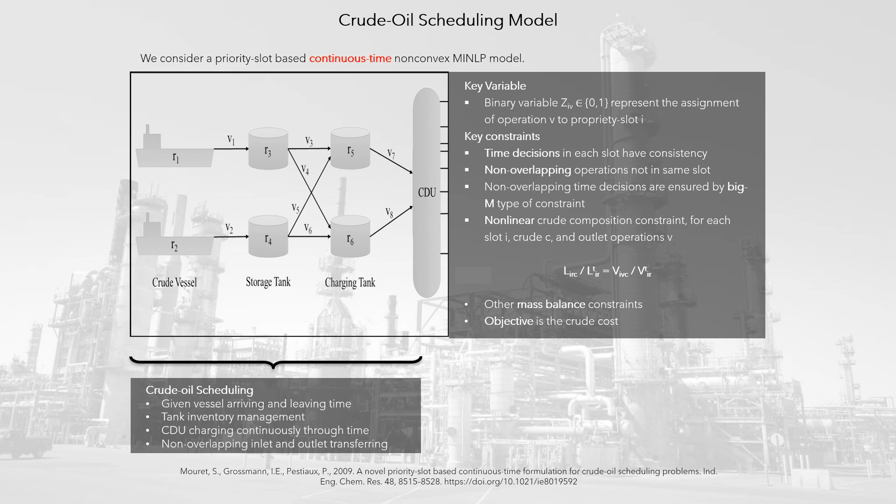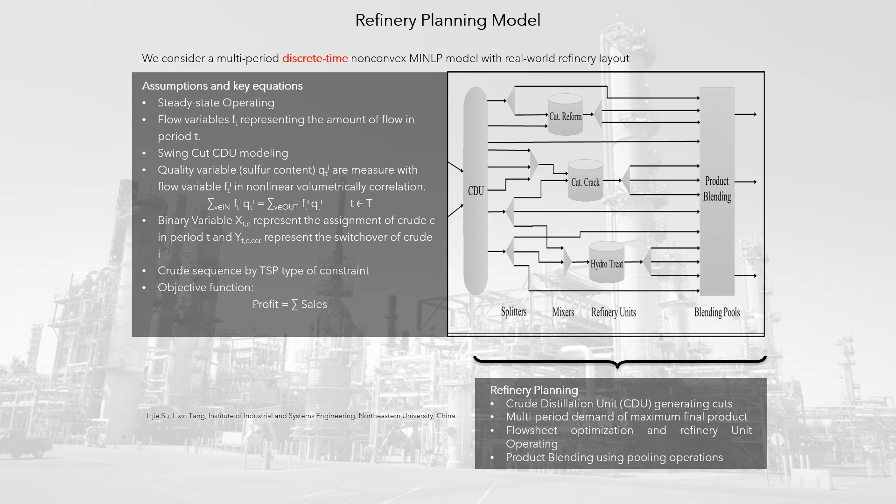The integrated problem, full space problem, is a non-convex MINLP. The integration process is: linking constraint, defined as the equivalency of CDU charging operations and CDU feeding operations. Full space problem, MINLP model containing scheduling, planning and linking constraint of CDU feedstock, and multi-dimensional approach, different time representations. Coordinate planning and scheduling starting and ending times.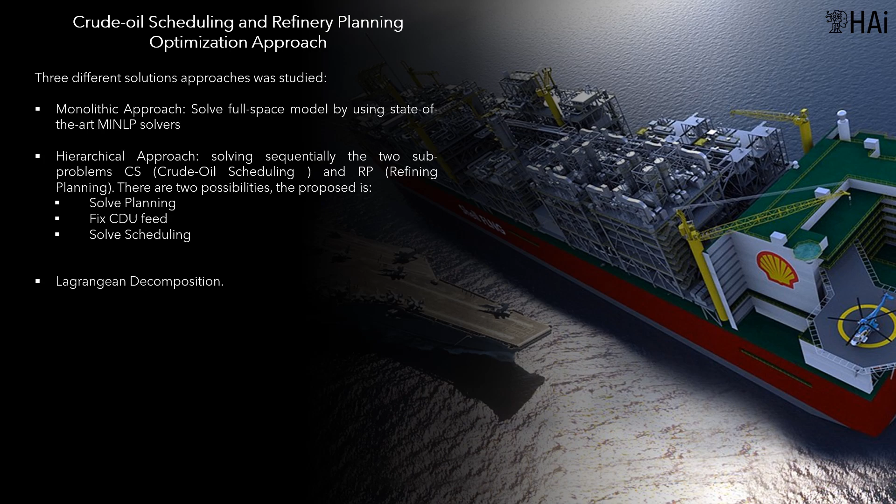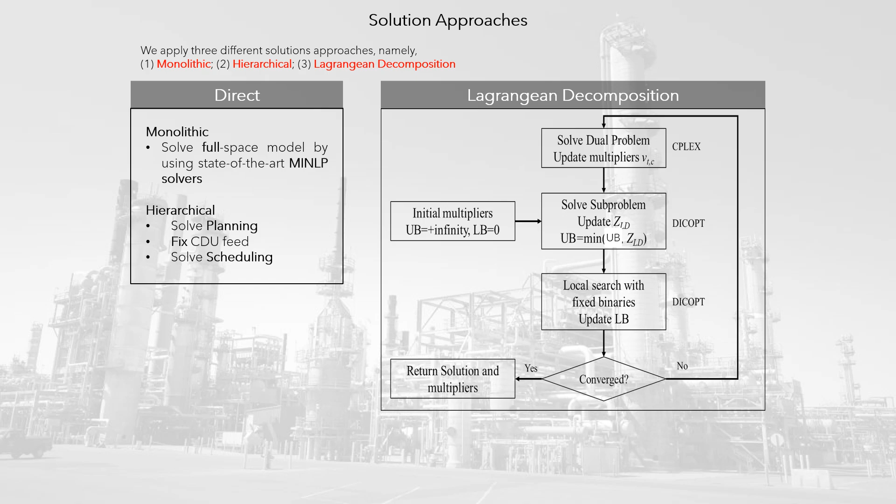3 different solution approaches were studied. Monolithic approach, solve the full space model by using state-of-the-art MINLP solvers. Hierarchical approach, solving sequentially the 2 sub-problems CS, crude oil scheduling, and RP, refining planning. There are 2 possibilities. The proposed is solve planning, fix CDU feed, and solve scheduling, and Lagrangian decomposition.

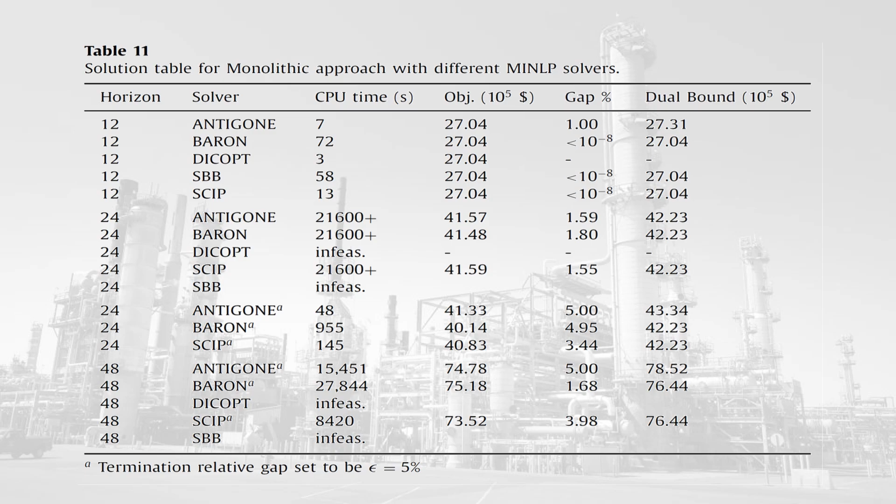For the monolithic approach, the different alternative solutions come from the state-of-the-art MINLP solvers used. For the hierarchical approach, the sequence of solving the 2 sub-problems CS, crude oil scheduling, and RP, refining planning, is a key decision. Both methods are tested in 3 cases and the computational results are presented in Table 10.

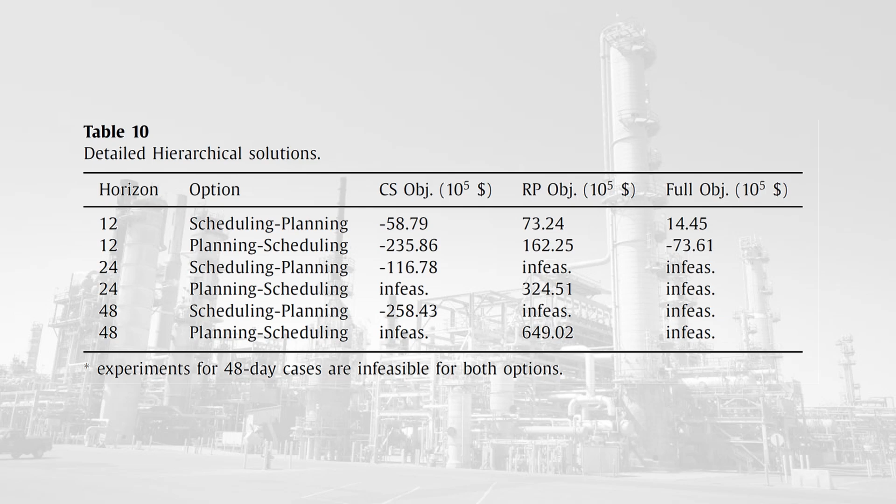The 2 options are stated as scheduling planning and planning scheduling, which explicitly represent the sequence applied for solving CS and RP. The objective value is determined by the sum of the individual CS and RP objectives. This process could be improved if cycles are incorporated to achieve convergence. The Lagrangian decomposition approach used in this work is defined based on Mouret et al.

Because of the non-convexity of the problem considered here, strong duality is not guaranteed and therefore there might be a gap between the global optimal solution and the Lagrangian dual which this algorithm may not be able to reduce to 0. It can be considered as a primal dual algorithm that uses an improved subgradient formulation for the dual problem, by exploiting a trust region approach.

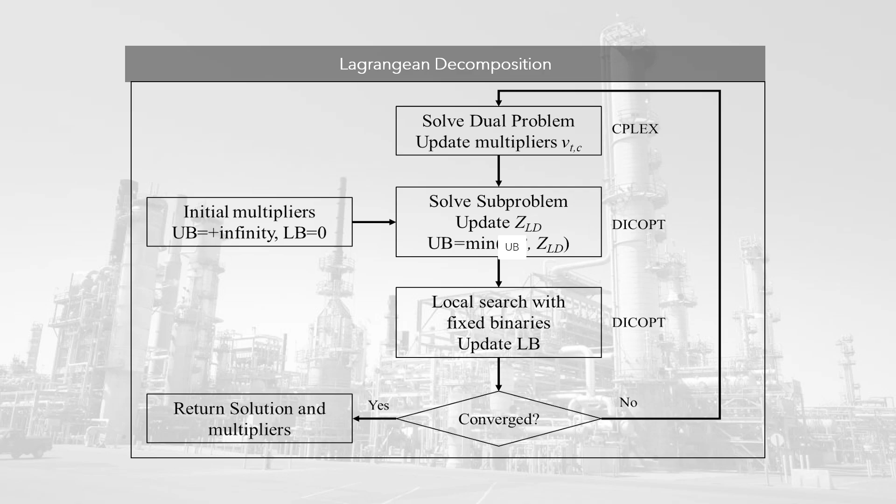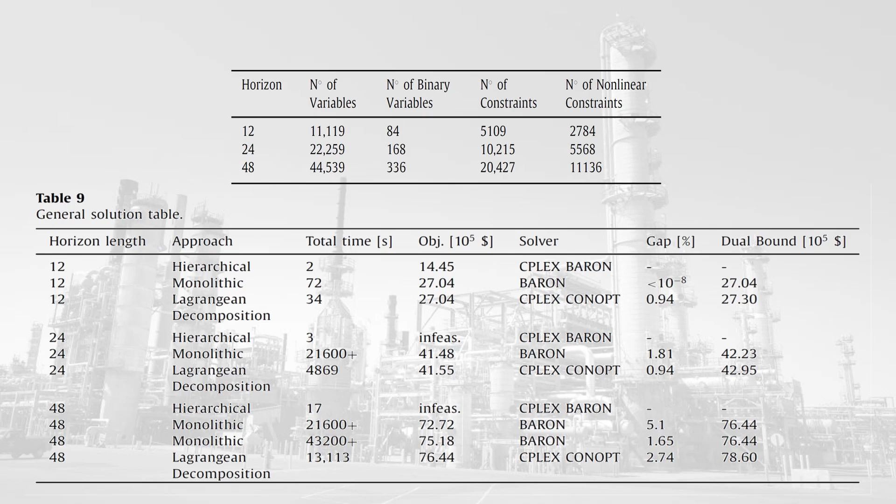The overall solutions of the 3 cases, 12 days, 24 days, and 48 days, are presented in the table. The objective functions for both monolithic and Lagrangian decomposition approaches are larger than for the hierarchical approach, 75%, 60%, and 6%, for the 12 days, 24 days, and 48 days cases, respectively, corroborating their advantage. Moreover, the proposed LD approach requires less CPU time converging to a small, 1% to 5%, optimality gap, when compared to the monolithic approach using state-of-the-art MINLP solvers.

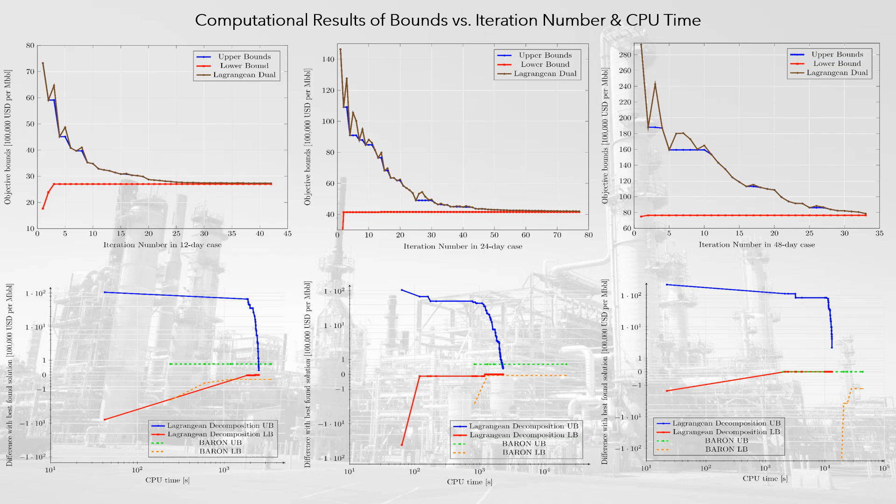The graphs present the computational results of bounds versus iteration number and CPU time. The graphs compare the Lagrangian decomposition method using DICOPT versus the BARON global algorithm. Optimizing the blend of crude oil and petroleum products is a multi-million-dollar application. This section is based on the document Crude Oil Blend Scheduling Optimization, an application with multiple million-dollar benefits.

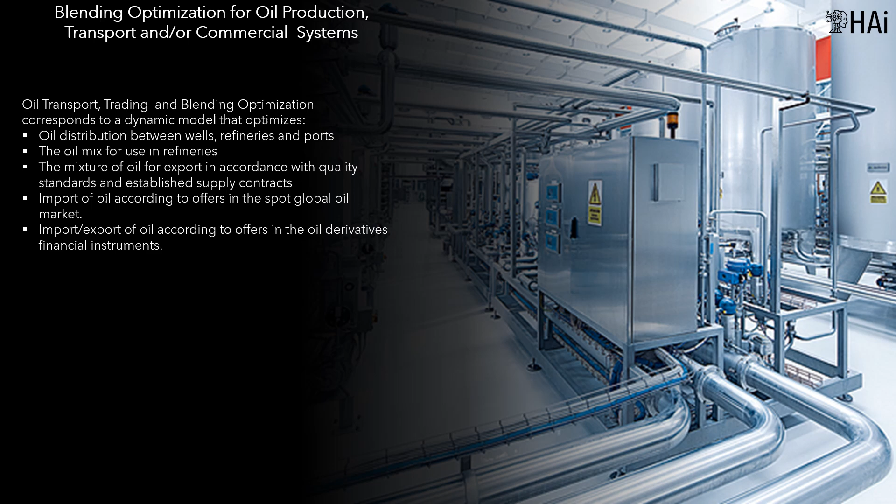It can be coupled to the production of oil fields, in such a way as to establish optimal plans for production, distribution, export and import. In addition, blending processes extend to petroleum products, for example, lubricants. A case of the optimization of crude oil blend scheduling is presented. The problem involves a pipeline, 2 receiving tanks, 2 charging tanks and a pipe still.

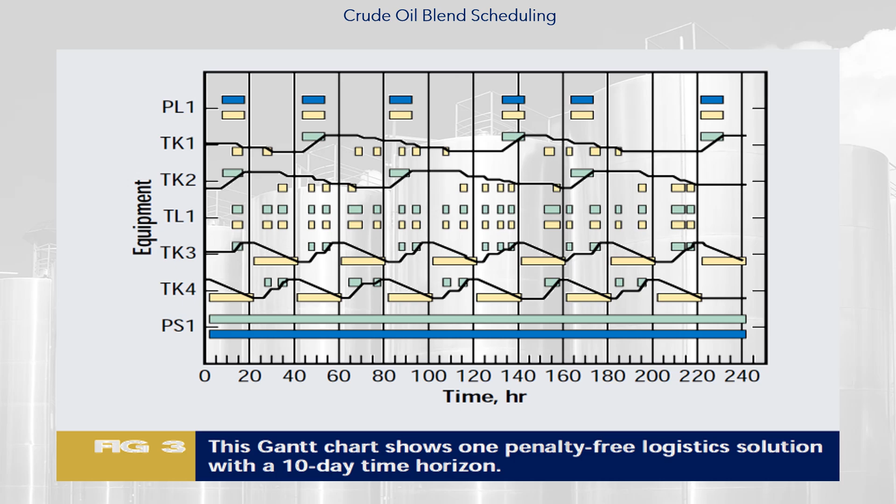Deviations from quality targets should be minimized, to charge the pipe still with a steady mixture of crude oil. Steadier quality crude oil mixtures charging the pipe stills will also translate into steadier operations for downstream production units. It also makes good sense to run pipe stills with a constant flow rate for as long as possible. An example of an improved quality target, or key planning proxy, is shown in the figure.

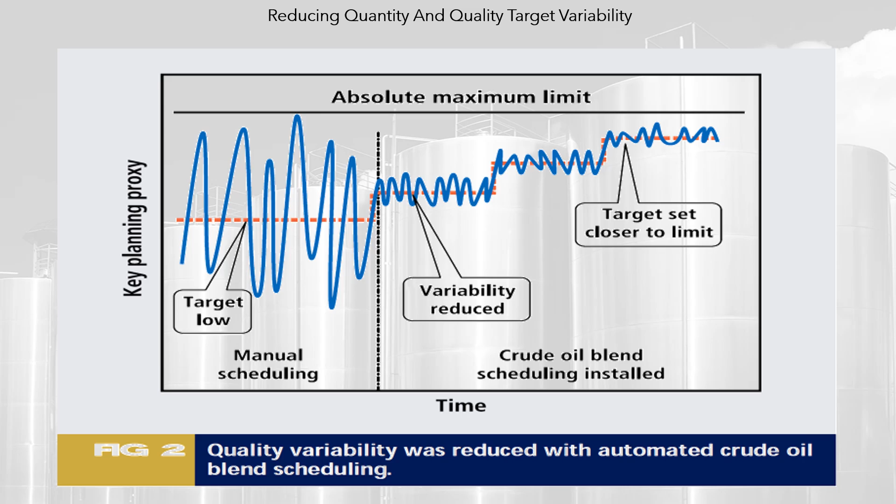Hypothetical benefit calculations. Total yearly savings in American dollars: quality target variability improvements such as whole crude oil sulfur, 2 million; reduced chemical injection, 100,000; distressed sale of crude oils from the refinery, 325,000; pipeline penalty charge for changes in sequence or timing, 75,000; spot opportunity for crude oil trades, 250,000; and reduced working capital, 100,000. Total per year, 2,850,000. These hypothetical benefit calculations translate into over $2.5 million worth of potential refinery profit that would not have been achieved with manual scheduling alone.

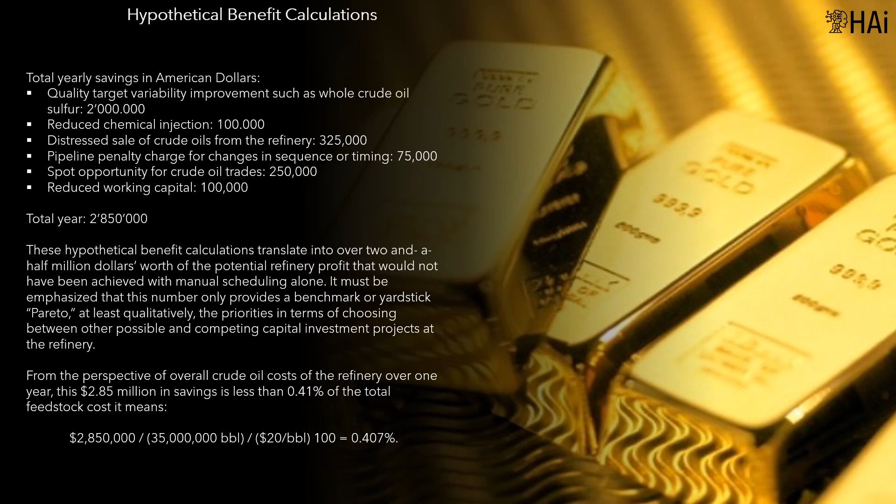It must be emphasized that this number only provides a benchmark or yardstick to Pareto, at least qualitatively, the priorities in terms of choosing between other possible and competing capital investment projects at the refinery. From the perspective of overall crude oil costs of the refinery over 1 year, this $2.85 million in savings is less than 0.41% of the total feedstock cost. Like Herbert Simon, Hypothalamus Artificial Intelligence believes that computer-based mathematical modeling is the greatest invention of all time.